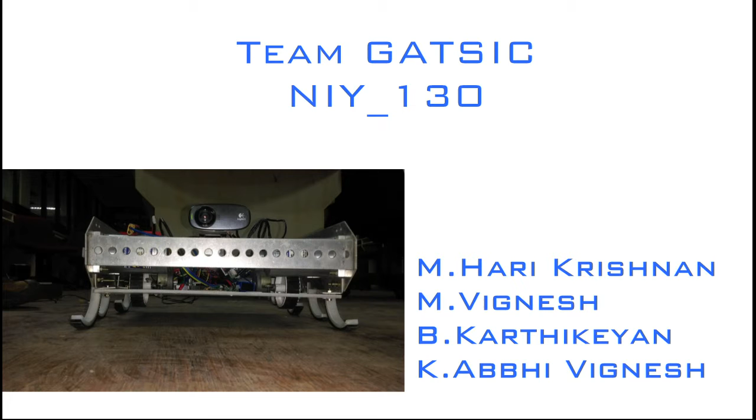Team ID NIY_130. Our project is GATSIC bot, which is Generalized All-Terrain Surveillance Intelligent Cluster Bot.

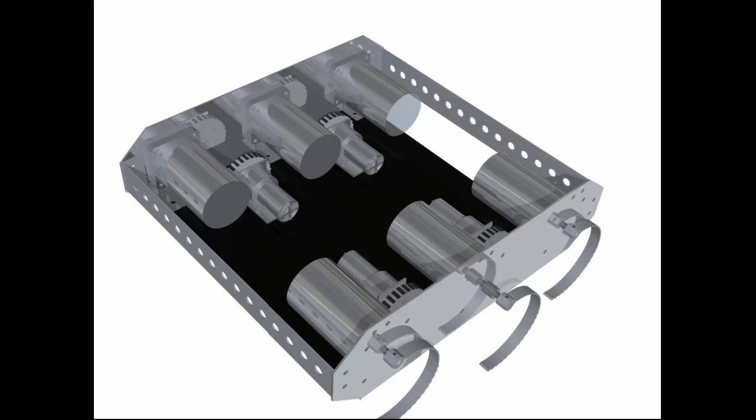Coming to the mechanics of the bot, it is a hexapod with 6 C-shaped legs, similar to the RHex of Boston Dynamics. But unlike the RHex, the GATSIC is equipped with high traction all-terrain wheels, which gives it excellent maneuverability on flat surfaces. The GATSIC is designed using Autodesk Inventor, with main design constraints such as lightweight aluminum chassis, robustness, and compact structure, enabling efficient all-terrain movement.

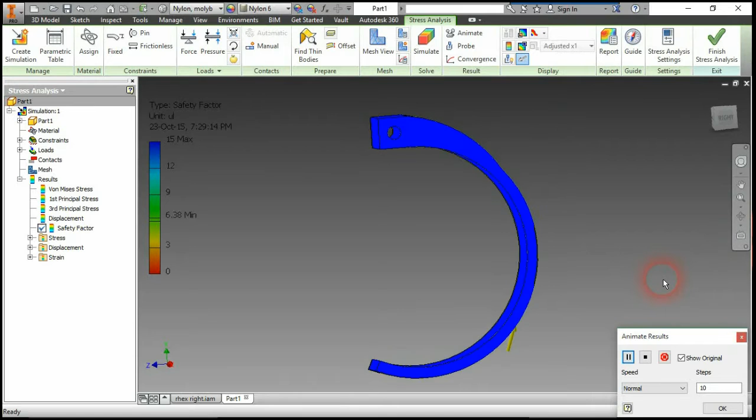Now coming to the analysis part, here we have the analysis of the factor of safety of a C leg. The factor of safety comes around 6.3, which is very good, and it indicates that our C leg has high strength and can withstand heavy loads.

Now the displacement analysis. The displacement is the movement of the C leg under heavy load. When the C leg is rotating, it experiences a lot of load, so the C leg moves up and down a bit. Here the maximum displacement is 5, which is very good for us.

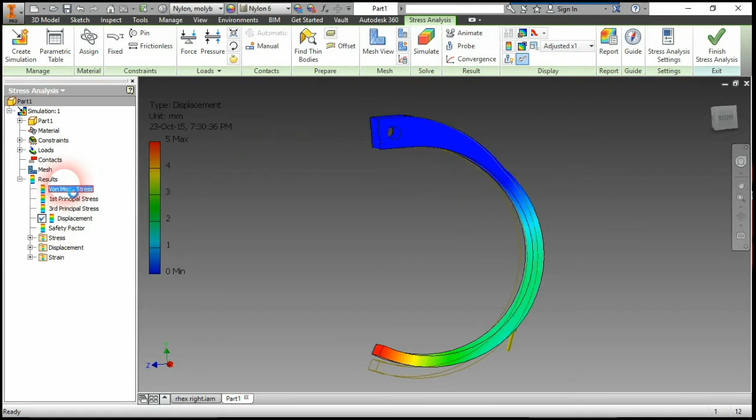Next coming up here is the stress analysis of the C leg. The stress analysis shows the variation of stresses on all parts of the C leg. Here you can see the C leg under flexing. The maximum load is at the center of the C leg.

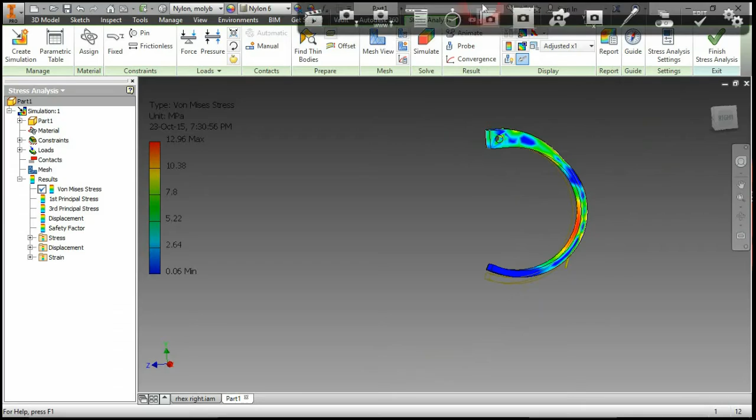Here we can see the manufacturing of the chassis using water jet cutting. The chassis is made out of aluminum, and we also use water jet cutting for the C-shaped leg, which is made out of nylon 6/6. This is the end product of the cutting up of nylon 6/6 C-shaped legs.

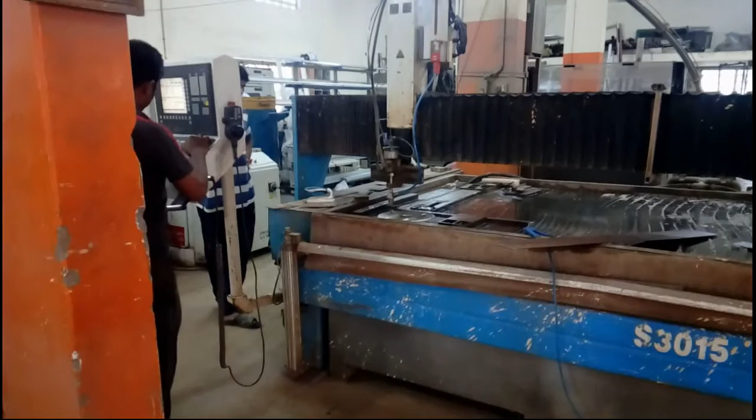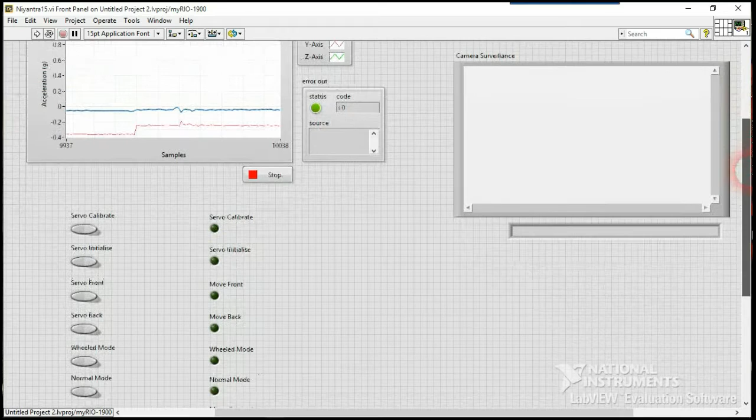Now let's go through the LabVIEW UI for our GATSIC bot. This is basically the front panel of the VI, and its main components are like the accelerometer graph values, which we use for getting input from the graph and for controlling the bot autonomously when it travels in various kinds of terrains.

We also have the camera surveillance panel over here, and an emergency stop is present here in case the bot has to travel in low power mode, etc. And the main switch off control is here.

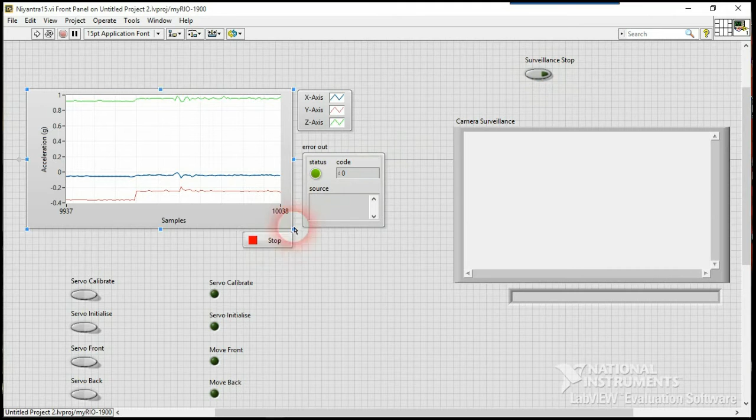The main actuator controls are present over here. We basically use two kinds of actuators in the GATSIC bot: one is servo control and the normal motor control. The servo control is basically for the RX-like compliant legs, and the motor control is used when the RX is not active in active mode.

In servo control, first servo calibration happens, then servo initialization, and then the four main motions like front, back, wheel mode and normal mode. Wheel mode is basically a semi-half circle mode that gets actuated so that this mode comes into actuation, and then normal mode comes into the normal actuation mode.

When the wheel mode is in actuation state, the forward, backward, motor left and motor right come into actuation. We also put an indication panel over here so that it indicates when the process is still running. So this is about the front panel of this VI.

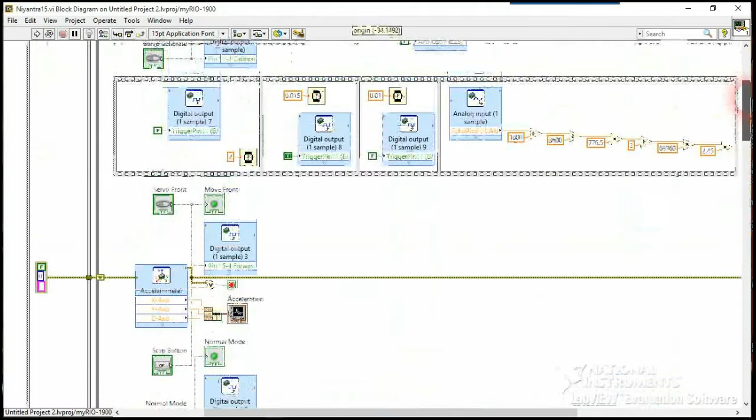Now let's move on to the block diagram. In order to show all the VIs at the same time, I've expanded all the sub-VIs, which I made into a single block diagram structure.

So it has three main structures, three main event frames: the initialize, acquire, and the end. Initialize is basically initializing the myRIO. In the acquire and process data, the main loop is present.

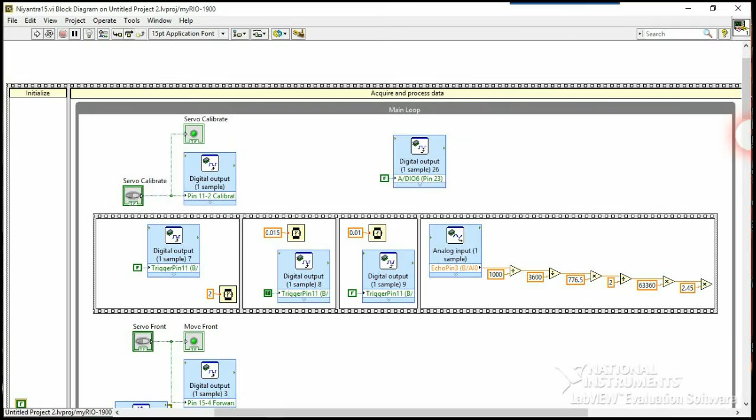In the main loop, the first thing is the servo calibrate, which calibrates the servo to initial values, and then all other states are present: servo front stop, normal mode, servo initialize, etc.

And the accelerometer structure is present here, and this is basically for the ultrasound. This conversion diagram converts the ultrasound values and gives the corresponding distances so that it will be able to actuate in autonomous mode.

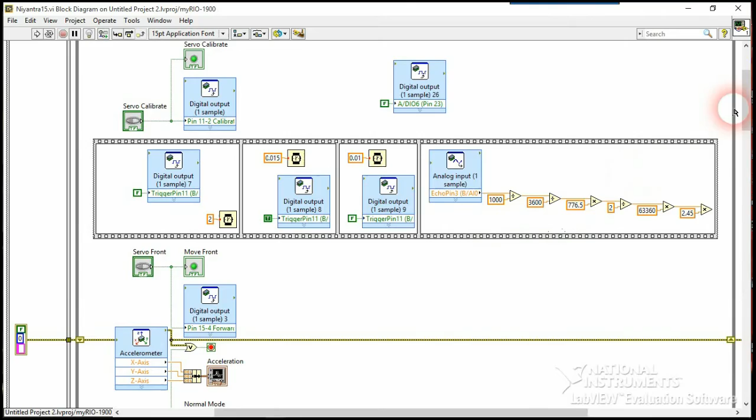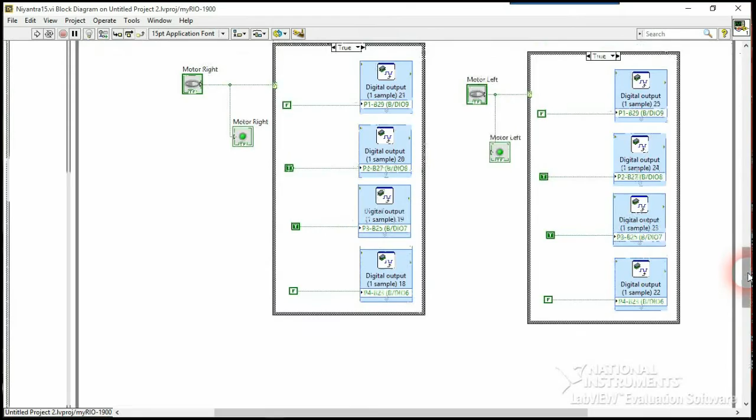And here, these four are for the motor controls in the wheel mode, and this is for the camera module. I just expanded all the VIs to show you the complete structure.

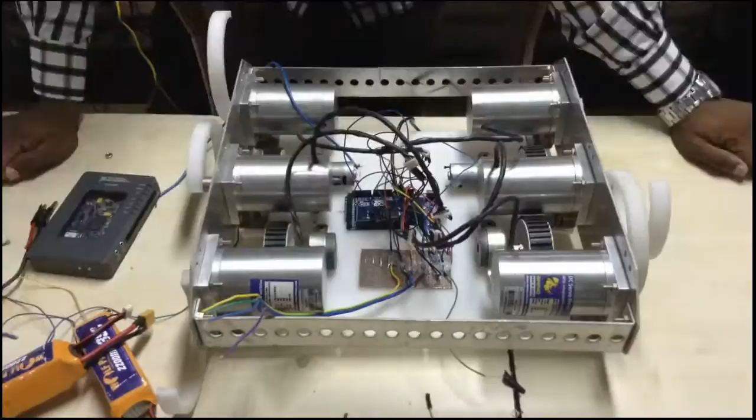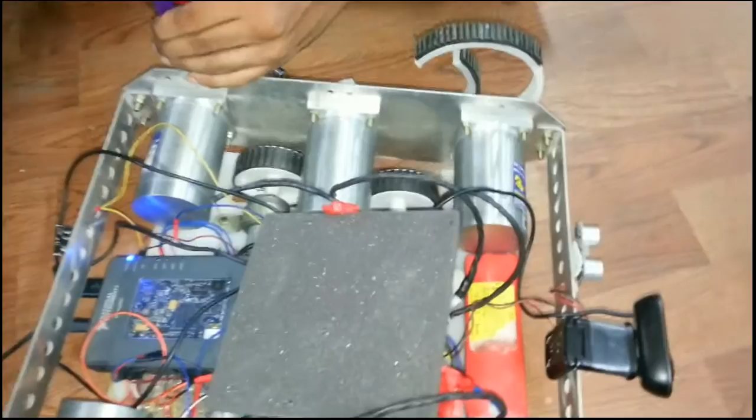While the mechanical work is still going on, let me use this time to explain the internal component connection structure. Coming to sensors, first we use the Logitech 720p camera in the front, and the rangefinder sensor, ultrasonic sensor, and the actuators.

We use two major actuators: one is the servo, we use Rhino RMCS, and the smaller actuator, the DC motor, is a Johnson gear, 100 RPM I guess, and everything is connected to the myRIO.

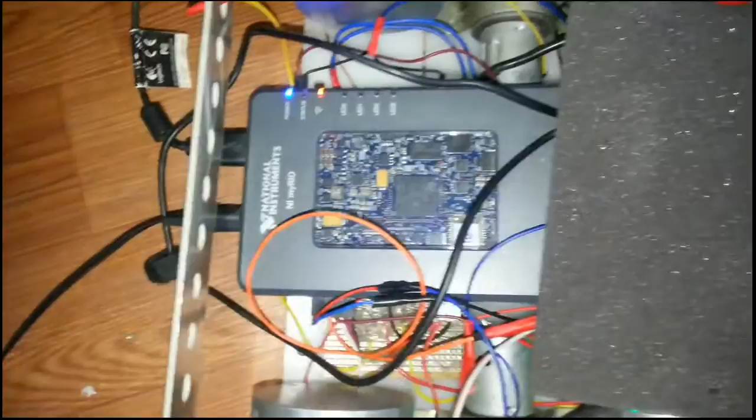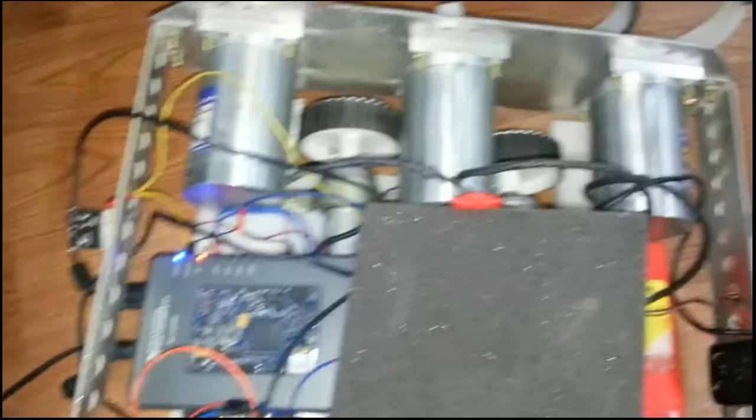So that's it, these are the major components, sensors and actuators on the controller part of the board. Apart from this, we do have other preliminary sensors which will be attached to the board later.